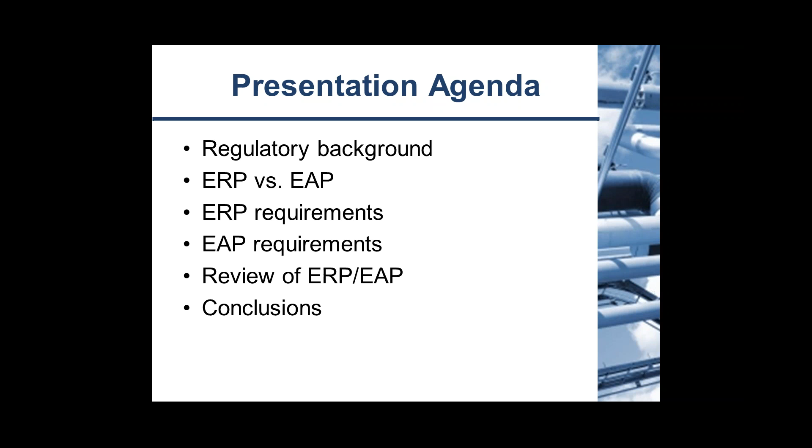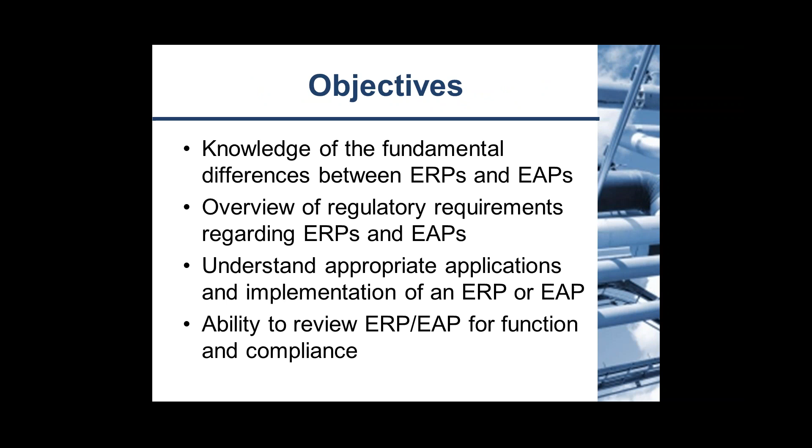The objective today is to provide knowledge for the differences between the two programs. Again, a brief overview of the regulatory requirements for both programs, to help everyone understand the applications and implementation of each plan and what makes them different, and provide the ability to review the ERP or EAP effectively for functional use and for compliance. So, brief regulatory background.

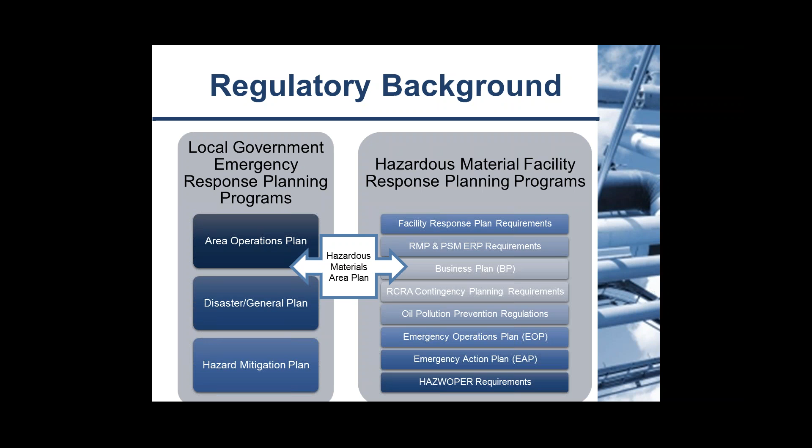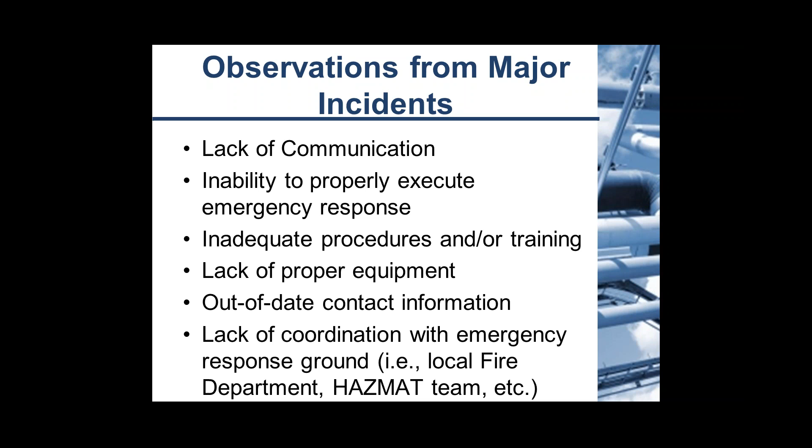Any kind of out-of-date contact information, which I've seen a lot, so ensure that all contact information is updated to the current job responsibilities and emergency contacts. And this includes 24-hour numbers for those top contacts that need to be available at all times. And a lack of coordination with the emergency response ground teams, so local fire department hazmat team. This was brought into the new CalARP regulations that were promulgated on January 1st of this year. Those are in effect right now, so it's important to remember to coordinate with your local teams, with your local fire department, and make sure that they are aware of what you have at your facility and how to respond, and that's even more important.

So what's the difference between an ERP and an EAP? Most importantly, the ERP is geared towards facilities taking offensive actions during an emergency. Any kind of response would include entering a hazardous atmosphere, where you could potentially need respirators and further training on respirator use, or any other area to shut down the system, or to rescue someone else. And so it's important to note that just because you may not be responding to a fire or going in to stop the leak, it still may be classified as a response. Response actions are needed for protection of life or prevention of significant damage to the property or to the community.

So it's important to note that there is a very fine line between response and non-response. We'll talk about that a little bit more this morning. The EAP is applicable to facilities that are non-responding or only take defensive actions. That's essentially evacuating and calling 911 or your local hazmat team.

There's not much else that's qualified as non-responding, except if you can remotely hit an emergency stop button on the system, whether there's an e-stop on the egress out as you're evacuating, or if it can be done by cell phone or remote or radio somehow. That's pretty much the only kind of response that you can perform that would be considered a non-responding facility or more of a defensive action.

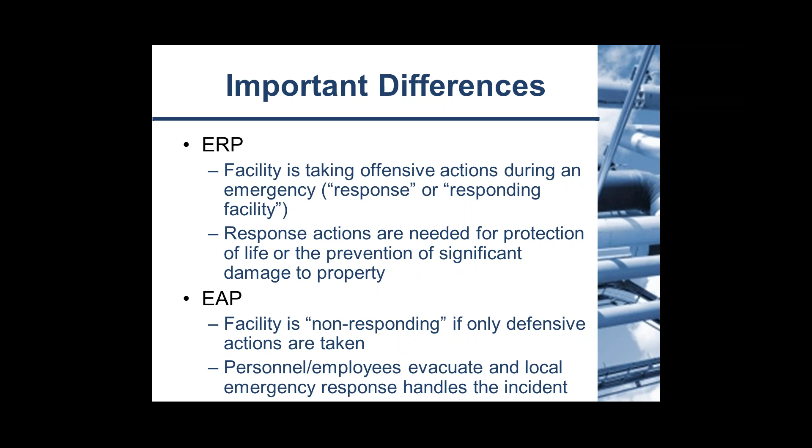They should be properly trained and have procedures in place on what to do and what equipment they need, et cetera. And with the adequate training should come preparation drills. Since the local authority will probably come in at some point to either take over or do some follow-up, it's still important to coordinate with local authorities, even if your facility is a first responding facility.

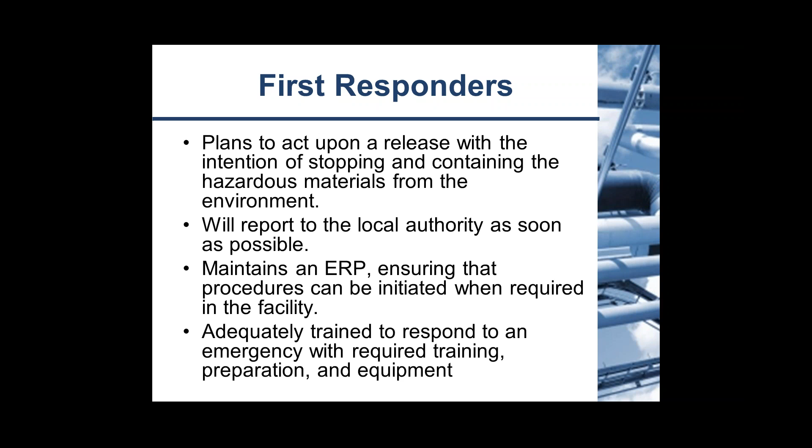For non-first responders, the plan is to evacuate. There are still established documentation and evacuation procedures in place, and personnel that are responsible for those evacuations and notifications. The local authority will basically have jurisdiction to respond. So we evacuate, we get everyone out of the building or off the property, we call 911, and 911 will handle it. Fire department and hazmat teams will handle it.

This will maintain an EAP and provide the information to support emergency responders. So you will still have contact lists, general procedures for some things, but it won't be as robust as an ERP since you're non-responding.

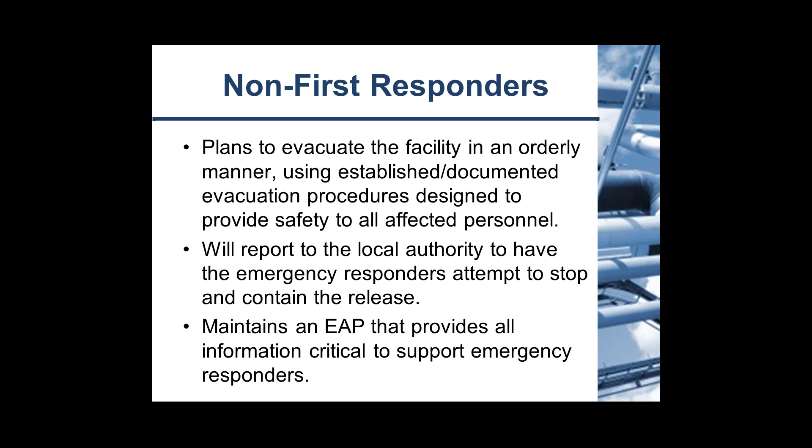So an ERP versus an EAP, the primary objective is to optimize the protection for personnel, the community, and the environment. It's important to take in certain variables like what personnel may be available and if there's a municipal emergency responder nearby, and the facility characteristics. What kind of resources do you have at the facility? Is it a large facility or something manned by 2 people that may not be able to respond? Is it manned 24 hours?

Is there a fire department nearby that can respond and maybe have faster response time with greater training, where they can be responsible for an incident with your assistance? So there's a balance between getting all parties involved, and there's usually an optimal response coordination that can happen. And it's just really important to remember that responsibilities are outlined, procedures are in place, contact numbers, and any other pertinent information if PPE is needed, all of that is in place before an emergency happens. It's all about preparation and training.

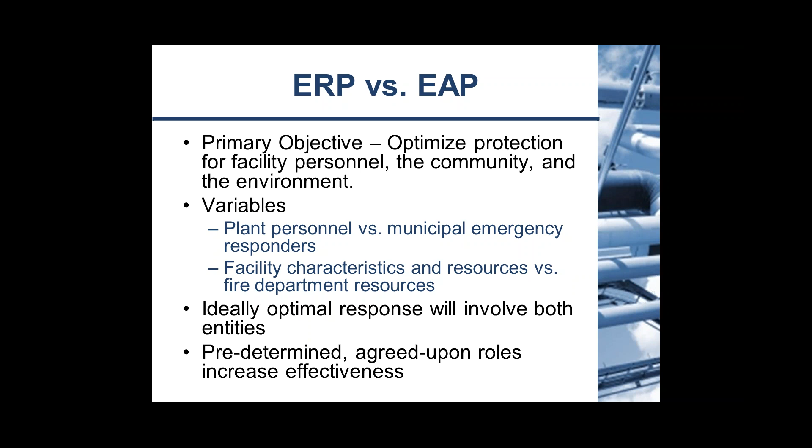So an application for an ERP, for example, would be a facility in a remote location or an organization that does not have a local fire department or hazmat team available to them for effective response. For the sake of having a good example, it could be an agricultural facility or maybe a refrigeration facility out in the middle of the desert somewhere, or outside of a major city where the fire department would not be able to respond quickly.

The facility may be likely to maintain a basic ERP with some personnel trained to handle maybe smaller incidents that are more manageable by a non-emergency responder, when you think of municipal responders like the fire department hazmat team. They will still need to be trained appropriately. The emergency response team will have to be ready and on call 24/7. And it will be important to keep the ERP updated and the personnel trained.

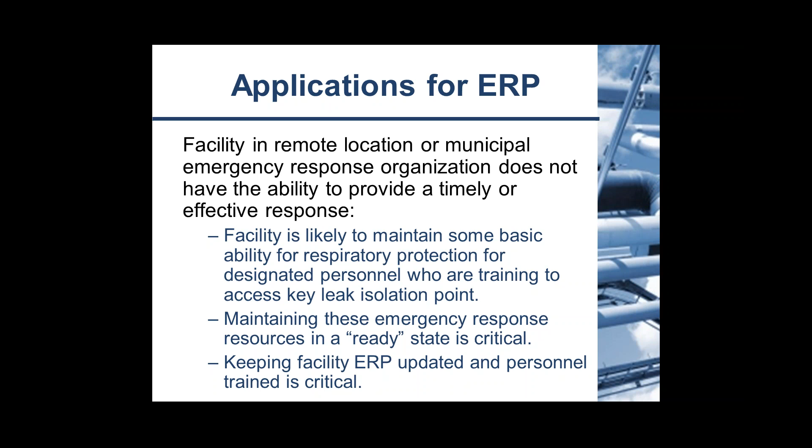An EAP would maybe be more appropriate in a heavily populated area where there is a local fire department or hazmat personnel available. Maybe the facility's down the street from a fire department. You've talked with the fire chief, everyone knows what's going on, and you don't necessarily need to have responders on site. An EAP would be appropriate.

And again, that would be coordinating with the facility and the emergency responders or the local agencies with walkthroughs, drills, exercises, and reviewing procedures together, especially call-out lists and things. Who gets called, in what order, what are the phone numbers, updating it all every year or when there are changes, and we'll talk more about when to update things later.

Discussing what the emergency responders are capable of in the area. Do they know the hazards of ammonia? Do they know the hazards of any other chemicals that may come into play that are on the facility? It's really important that these first responders, whether internal or external first responders, know the hazards of the chemicals that they're working with.

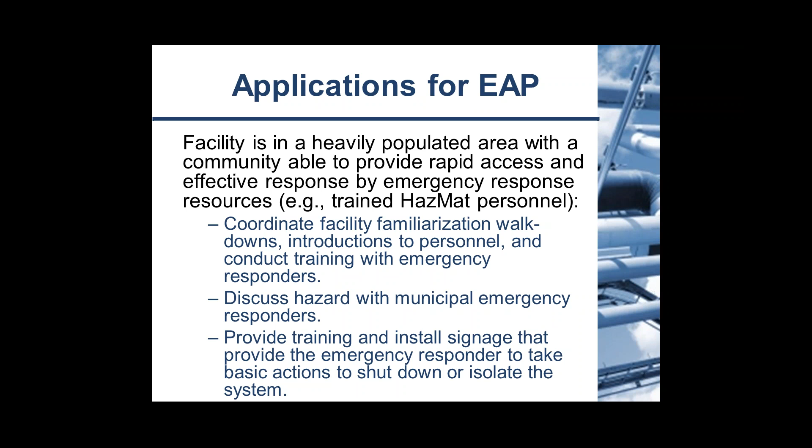And this also goes into general employee notification as well. Training and signage, any kind of emergency shutdown procedures, that all needs to be in writing and also trained to the emergency responders that will be on site. So where do the ERP requirements come from? They're all listed in Title 29 of the CFR in 1910.120 Section Q. And we'll go through those.

The ERP requirements call out pre-emergency planning and coordination, personnel roles, training and communication, and lines of authority, how to recognize an emergency and to prevent an emergency from happening, where are the safe distances, places of refuge at the facility or just off the facility, and what kind of site security does the facility have, where are the evacuation routes, and what are the procedures for evacuation.

Is there any kind of decontamination that needs to happen if someone's exposed? How does that happen? Any kind of emergency medical treatment. Who's qualified to provide first aid? What training is provided? Where are the training certificates located? Any kind of emergency alerts or response procedures. Who's going to do the call-outs? Who's responsible for calling the fire department when it gets out of hand, or to follow up after the fact?

Who's going to critique the responses? Do you have someone ready and available to evaluate whether or not the response was adequate and whether or not the drills are adequate? And any kind of PPE, who's going to keep track of that? Who's going to ensure that the correct PPE is available to those emergency responders? This could include additional HAZWOPER training and medical surveillance, and respirator fitting, things like that. That all needs to be coordinated in the ERP and at least called out and referenced in the ERP and

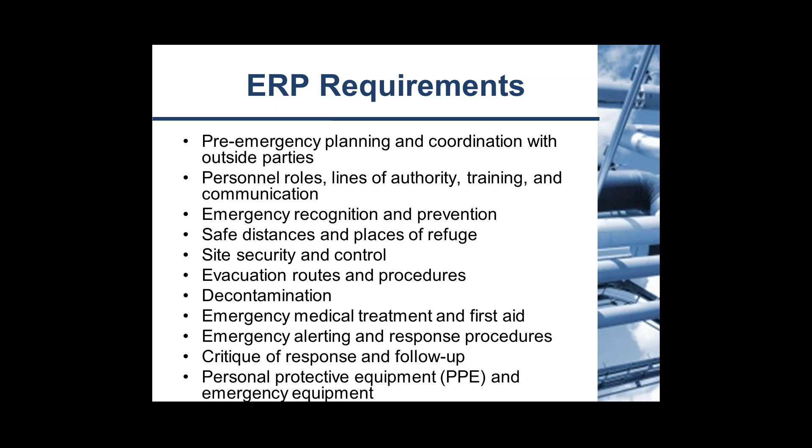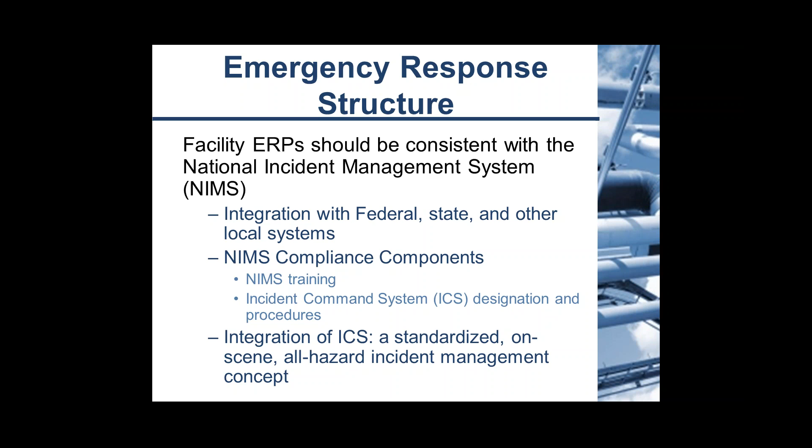done and completed. The emergency response structure should follow the National Incident Management System, NIMS. And NIMS is basically a command system for communication down the line. It establishes responsibilities and integrates up the line, basically to a state or federal response. So it keeps everything coordinated. It maintains a structure for communication that can be carried up the line should the response or the incident get much bigger than expected.

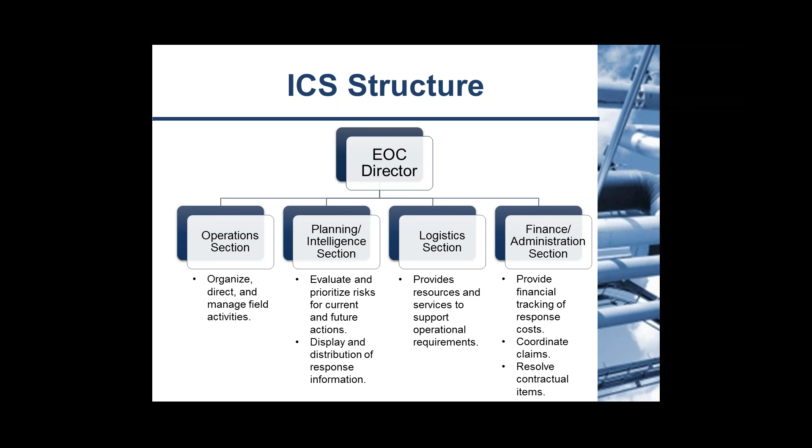And this is a slide for the ICS structure. You have an Emergency Operations Center Director with the Operations section organizing and directing field activities. The Planning and Intelligence section evaluating and prioritizing risks associated with the response and the distribution of the information that is necessary. The logistics section will provide resources and services to support the operations during an emergency, and more on a municipal level, the finance administration section will take care of claims, resolve contractual issues, and track any kind of financial aspect of the response.

The ICS has some key features. There's some common terminology, and again, this is all to coordinate up the line, from the facility level all the way up to a federal level of communication, to keep everyone on the same page and to make sure everyone understands one system to communicate. So there is common terminology to be used and an organizational structure for everyone, even if it's not applicable in some cases. Like I said, the administrative and finance section may only be at a municipal level. It's important to be aware of all that.

There are consistent position titles, so everyone knows and understands the positions in play. Integrated communications, that's unified across the board. Common incident facilities and where this will all be commanded from, like a command center. There's modular organization and a command structure that work together and are uniform. There are action plans that are pretty standard across the board, and again, this is to keep everyone on the same page during an emergency and to be able to carry it up the line. There's a span of control associated with who's responsible and what kind of agency should get involved and when, and then resource management and scalability to it.

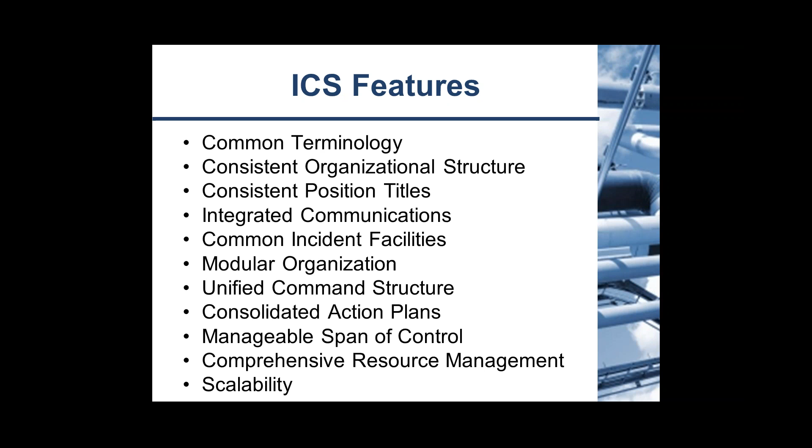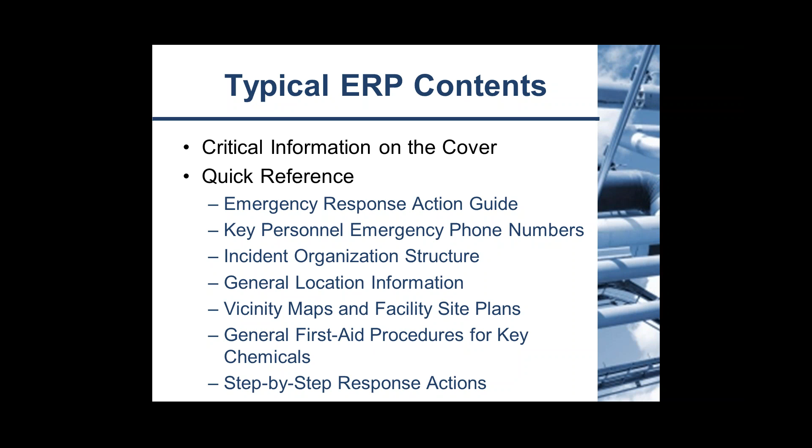Then there's usually supporting information behind the main report. These are usually in appendixes. And this will contain maybe additional contact information, maybe a longer list of people that need to be notified if the emergency gets larger or after the fact, after the main contacts are called and informed. If there are any forms or an overview or position descriptions for the ICS structure,

shutdown procedures or alarms that may indicate where there's an issue, locations of the chemicals, if there's more description other than a basic map. And if there's any other engineering data or public relations, if there's a script that should be used for public relations or other supporting documentation, that should all really be in the back of the ERP.

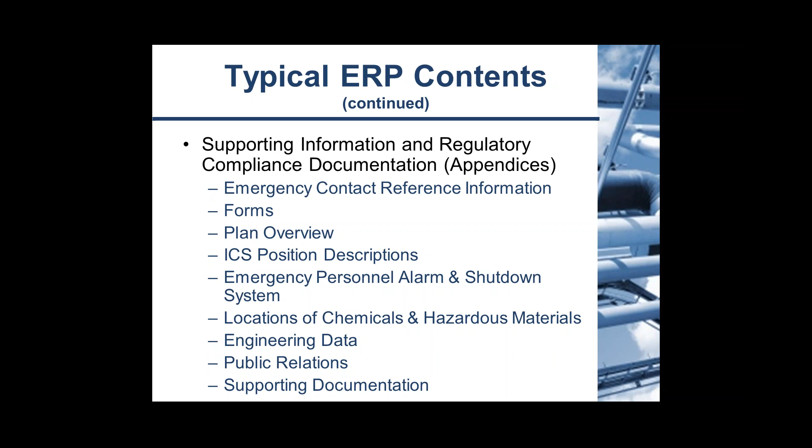And it's more for, okay, we got the initial response going, we're starting, now we got to kind of do the follow-up. Where are those forms I need? Hey, the press is calling. We need to get that script together so that we know what we're going to say about this. And that's all very important information to have, but not necessarily in the midst of the beginnings of an emergency. Training is actually called out pretty explicitly in the regulation.

There are several levels of first responders that need to be trained specifically. These trainings should be conducted by a certified instructor, and they have to be approved through a certification process. You can't just perform these trainings or attend these trainings by just anyone, and it's important to note that. There's a first responder awareness training.

And this is basically, the person is trained at a level to initiate emergency response. They know who to notify, what an emergency looks like, if there's an incident, a spill or whatnot. They're able to make the call on whether or not this is a small spill that can be handled internally and it's not really an emergency response, but more of just a spill cleanup, or if this is a major incident ready to happen or already happening.

And they need to be trained and ready to make that call on the spot. It's a pretty basic training. I think it's an 8-hour training of just an awareness level. The first responder operations level are trained to take a defensive action without stopping the release. So if they can contain a spill to keep it from going farther, keep a liquid spill from spreading, or maybe shut a locked door to keep vapor inside a room and prevent exposures, that's their responder level.

And that requires 8 hours of training that will include basic hazards, proper PPE to put on, and standard operating procedures. Then there's the hazardous materials technician. These people are trained to respond to a release with the intention of stopping the release. This is a 24-hour training, 8 of which are equivalent to the FRO training from the operations level.

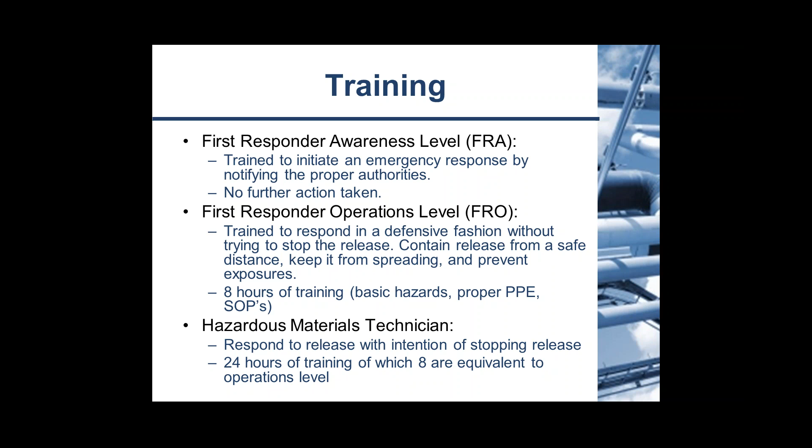The hazardous materials specialist is to provide support to the hazmat technician. They are trained as a liaison to any kind of municipal agency or government authority that could come in and help or potentially need more information. And they have the same 24 hours of training that the hazmat technician has, but they just carry a different role and responsibility. And there's the on-scene incident commander.

They assume control after the first responder awareness level trained person witnesses that there's an issue. That's the first person they go to, is the incident commander. This is the person who will be in charge, have ultimate responsibility over response in the emergency. They have 24 hours of training equal to the first responder operations level. And they also should go through the training for the ICS and ERP implementation.

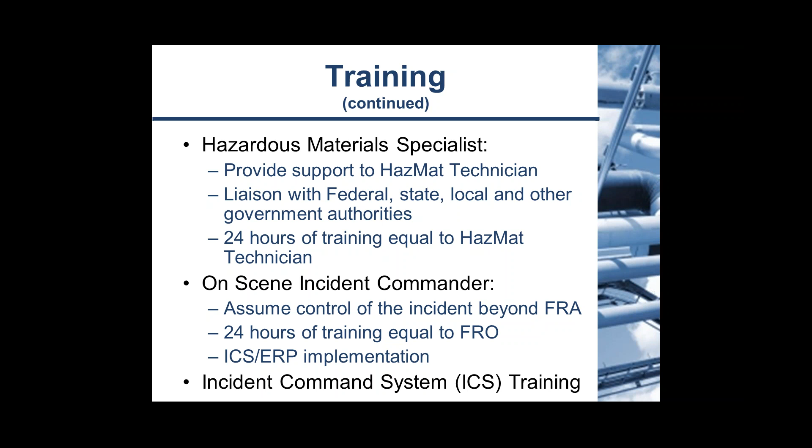ICS and NIMS, again, are available through the FEMA website, and they have lots of levels of training and different variations depending on how explicit and how responsible a facility wants to be as far as having an incident commander, how authoritative they want to be about that. And that kind of goes into the last bullet there with the ICS training. There are also tabletop drills and exercises that should be done by anyone at the facility.

If you have an ERP in place, everyone should understand and participate and observe drills and exercises, tabletop exercises, physical evacuations and exercises to perhaps stop a leak or something like that, and make sure the emergency responders nearby are involved. Even if a facility has an ERP, the local responders, the fire department, hazmat teams, whoever may potentially respond from a 911 call should also be invited to these. It is important to keep these local authorities informed in case it progresses into something the facility can't handle. And that's really important to note.

As far as equipment goes for emergency response, it could be anything from fire extinguishers and spill kits to proper PPE. Again, we get into the potential for respirators, SCBAs, or encapsulated suits, depending on the chemical and the type of response that's going to be initiated.

Communication. Radios are really important. Don't want to use cell phones. You never know if they're going to be reliable or not. The radios that are charged at the ready and in one spot are usually very useful. Emergency alarm systems, are there any on the facility? Should they be added to the facility to help with an emergency and response?

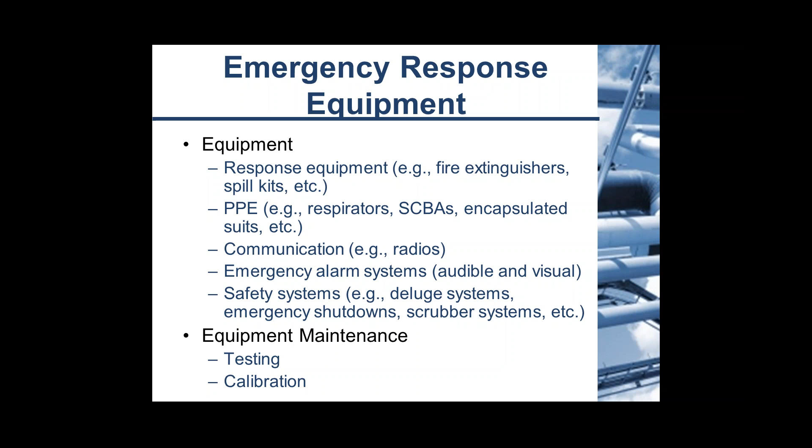And any kind of safety systems, deluge systems, emergency shutdowns that are automatic, scrubber systems, any of this that may be useful to prevent an emergency or help during an emergency. And with all this comes testing and calibration of the equipment, and that's important to note as well. Those will have to go in the procedures.

And with that, we move on to the emergency action plan requirements that are called out in 29 CFR 1910.38(a). And these are much lighter. As we go through them, you'll see there's a lot less documentation because of the non-responding nature of the facility.

The EAP requires you to identify the designated actions of employers and employees, what they need to do to maintain safety from fire or other emergencies. Again, this goes into a non-responding facility, so it's an action that you could take without actually falling into that response category. And it's a very fine line, but it's very important to note.

Specific requirements of the EAP are to have an emergency evacuation procedure and route assignments. Knowing what's upwind and uphill versus maybe potentially downwind, wind roses and windsocks in the area are very helpful for this. There should always be maps included within the plan, and I always recommend them around the plant site, whether posted on an emergency exit wall or available in multiple locations to grab on your way out the door.

The map should contain routes, windsock locations, and meeting area locations. And again, everyone at the facility should be trained in this as well. The procedures should have a method to account for all employees during an evacuation. There should be someone responsible, or maybe multiple people responsible, for taking a head count when everyone gets to the meeting location, making sure everyone's accounted for.

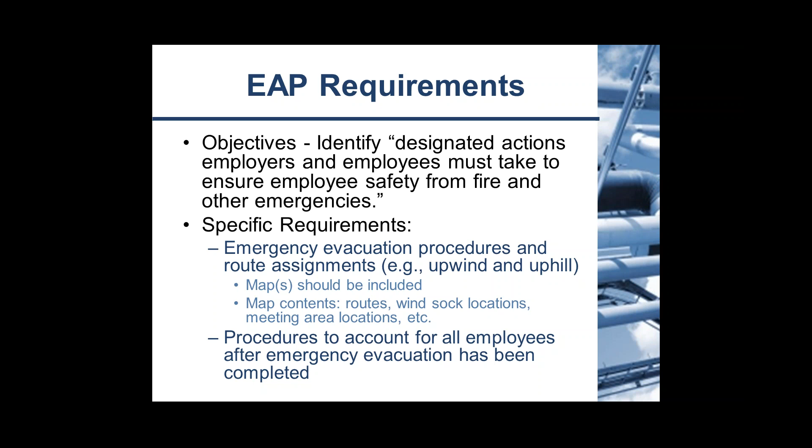There should be procedures for employees who perform rescue or medical duties. This would fall into CPR, first aid. If they have any medical training, notate that: who's qualified, who's been trained, who knows where the equipment is, marking where the first aid kit is on the map, or notifying people during training.

Essentially, these people should not become part of the problem. They should be helping. So it's important, again, to come back to training and procedures and exercises, that all this needs to be happening. There should be names and job titles of the people or departments that can be contacted for information. This includes 24-hour numbers. So again, maintaining documentation with updated contacts and contact information.

And there should be an employee alarm system. How is everyone notified there's an emergency happening at the facility? Is there a visual or audio alarm? Does someone walk around notifying everyone? How do you account for people that may be outside and may not hear an alarm that's inside a building? Things like that need to be accounted for and specified within the plan.

And again, coming back to training, everyone needs to be trained. Evacuation drills, bringing in the local fire department to help with some of that response. This all comes into preparation and training and making sure everyone knows what they're doing during an emergency.

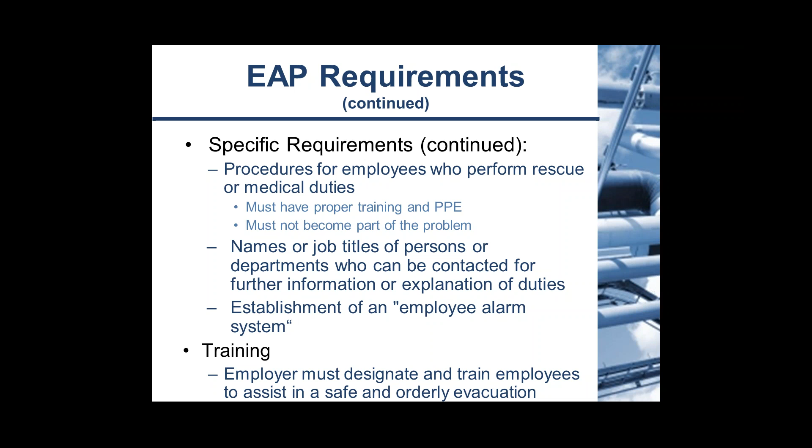So when you're reviewing your ERP or EAP, it's important to note that employee responsibilities and emergency contact points are clearly delineated. Again, we go back to putting the most important information on the front cover. That way it's right in the middle of where you're looking, and it's very easy to find in an emergency. Also, make sure that all information is current. This is especially important if you have high turnover at a facility. Keep the plan simple so that it can be updated realistically and easily.

And this goes into modularizing the plan to facilitate updating. Maybe you put all the contact numbers on 1 or 2 pages at the front. That way, if anyone leaves or you need to update phone numbers, you just have to replace the 2 pages rather than trying to find those 2 pages within a 20-page section of the report.

And that also comes into usability, that you want to make this easy to use. You have to assume, even if everyone's trained, that someone will panic and not know exactly what they need to do, and make it as easy as possible to use this material or the plans during an emergency.

Knowing the evacuation and the employee accountability plan, knowing who's responsible and outlining that explicitly in the report is very important, that those people are trained and can handle that kind of responsibility to make sure everyone can evacuate appropriately. And reference non-critical information. There shouldn't be a lot of fluff. This should be very straightforward, to the point.

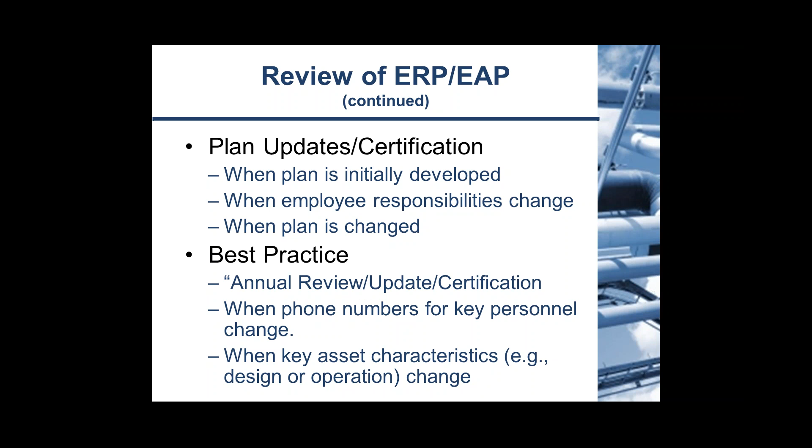And for the Program 1 and Program 2 facilities, it's just a good idea whenever you make changes to just go ahead and check it. It doesn't hurt to spend a few extra minutes so that if there is an emergency, you're prepared and ready to go.

So in conclusion, it's important that each facility validate the best ERP or EAP option, balancing the municipal resources in the area, the responsibility the facility wishes to have to protect personnel, community, and the environment, and the cost to upkeep the program. This can be costly to train people. It requires a lot of time and effort at the very beginning when you initiate this. It could be a resource issue at the facility.

Again, maybe your facility has 2 people on site maintaining the facility 24 hours, and you may have a larger crew in another time period, maybe normal daylight hours. It's important to know those resources and what your capabilities are, and not build, say, an emergency response plan for a facility that just doesn't have the personnel to be able to do that.

And to keep the training and emergency drills going. It's really important to do those at least once a year. And again, if you don't have the resources or the funds to do that, it may be better to look at other options for emergency response.